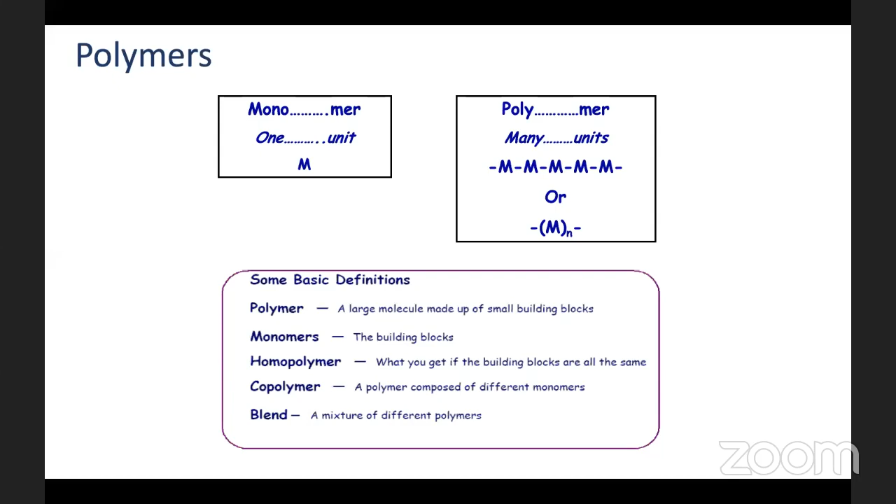So how do we classify polymers? Basically, polymers are classified into three categories: thermoplastics, thermosets, and rubbers or elastomers. Thermosets and rubbers or elastomers are 3D networks which are covalently cross-linked, and they get cross-linked when you apply heat and curing agents into them.

Thermoplastics are long chain polymers which are bound together by physical entanglements. This means the chains have van der Waals or dispersive forces between them, and they come together and form solid domains, crystalline domains, and amorphous domains. So thermoplastics can be of amorphous nature and semi-crystalline nature, whereas thermosets and rubber elastomers are amorphous materials.

Examples of thermoplastics would be polyethylene, polypropylene, which you use in daily applications. Polyether ether ketone is an engineering thermoplastic used in engineering applications. Now people are trying to use polyether ether ketone in bearing applications - they want to make bearing cages out of it.

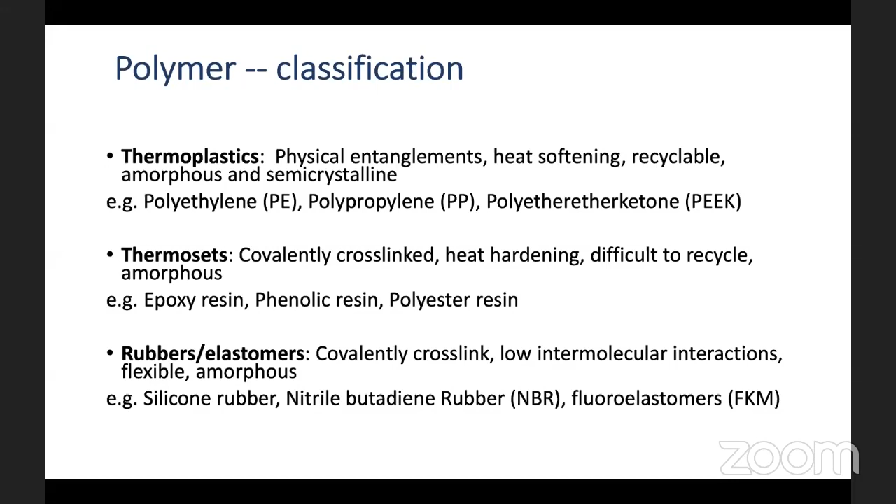So what makes polymers unique? What properties are more important for an application? Polymers are viscoelastic solids, meaning they behave both as an elastic solid and a viscous liquid.

Whether a polymer behaves as an elastic solid or viscous liquid is decided by what we call the Deborah number, defined as the relaxation time divided by the observation time. If your time of observation is very large, the Deborah number is much less than one, and you will see that everything flows.

There are instances in the Bible or elsewhere where they say mountains flowed before the Lord, because the time of observation is so high for him that everything flows. Then there is elastic behavior, where the relaxation time is much higher than the observation time. Viscoelastic behavior is in between these two.

Polymer properties depend on temperature, time, and applied stress and strain, which I will discuss further in the coming slides. Properties of polymers can be tailored for any particular application. You can compound polymers with additives and fillers to make them suitable for any application, taking into account the limitations of the polymers.

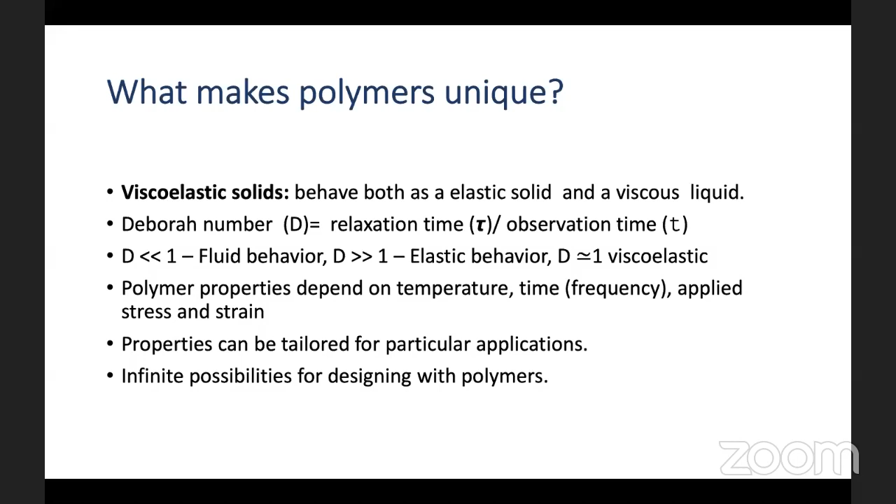Now I will talk about the most important property of any polymer, called the glass transition temperature, and then I will discuss time-temperature superposition.

Glass transition temperature is the temperature at which polymer chains start to have segmental motion. There is an onset of segmental mobility in the polymers, meaning they start to move.

If you decrease the temperature, the segmental mobility will decrease, and if you increase the temperature, the segmental mobility will increase. So there is a freezing of segmental mobility and an unfreezing of segmental mobility. The point at which this happens is called Tg of the polymer, that is, the glass transition temperature.

The segmental mobility depends on the free volume available for the polymer chain segments to move. When you decrease the temperature, the free volume in the polymer starts to decrease, the polymer starts to contract, and with less free volume, the polymer chains cannot move.

They then behave as elastic solids. You see here that if this is a shear modulus versus temperature curve, as you lower the temperature, you have an elastic solid with very high modulus.

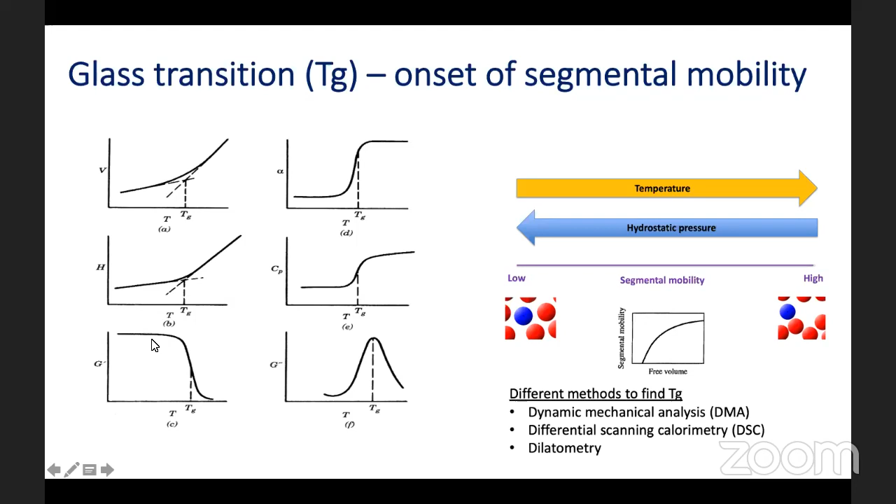I've listed some glass transition temperatures of common polymers, including some elastomers. Polyisoprene is a natural rubber with a glass transition temperature of -73. This means below -73, polyisoprene or natural rubber will start behaving like an elastic solid, and above that, it will behave as a rubbery material.

High density polyethylene has a Tg of -115, but polyethylene is still a hard solid at room temperature due to its semi-crystalline nature. There are different polymers with their Tgs given here, and their melting points are also given.

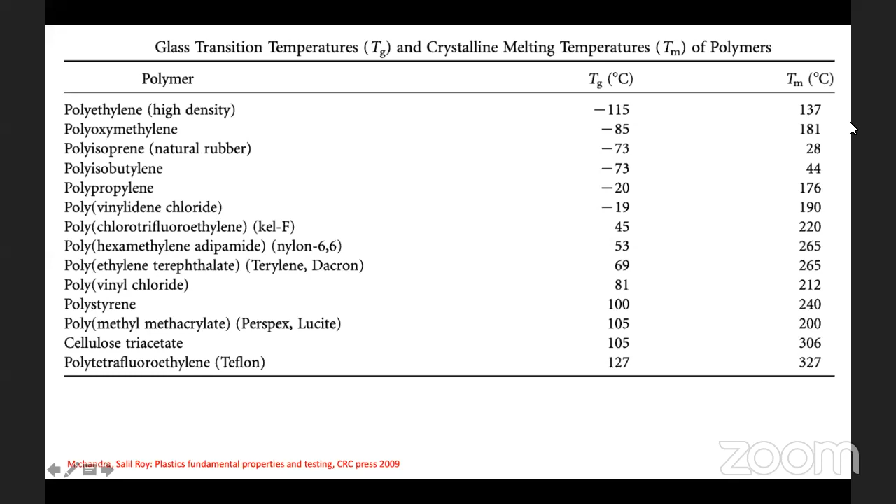In polymers, there is what we call the time-temperature superposition principle. Here we say that frequency and temperature are equivalent.

For example, if you measure shear modulus as a function of frequency at different temperatures, you can take a reference temperature, say T0, and keep it as it is, but then shift the segments measured at T1 and T2 to form a smooth master curve.

The objective of forming a master curve is to extend the range of your measurement, and to save time in property prediction. So if you want to predict storage modulus at very high frequencies, with the data here you cannot predict. But with the time-temperature superposition principle, you can shift these curves and predict storage modulus at very high frequency and also at low frequency. So this extends the range of your prediction.

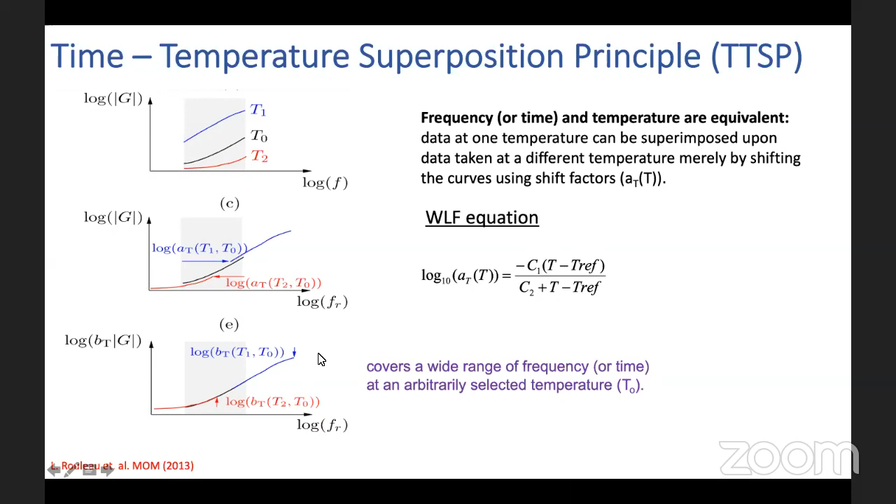Here is an example of master curves made using the time-temperature superposition principle. You can see that with this principle, you can extend the range of your property prediction. And here are the shift factors which were used to make these master curves, and each material has its own WLF fit constants.

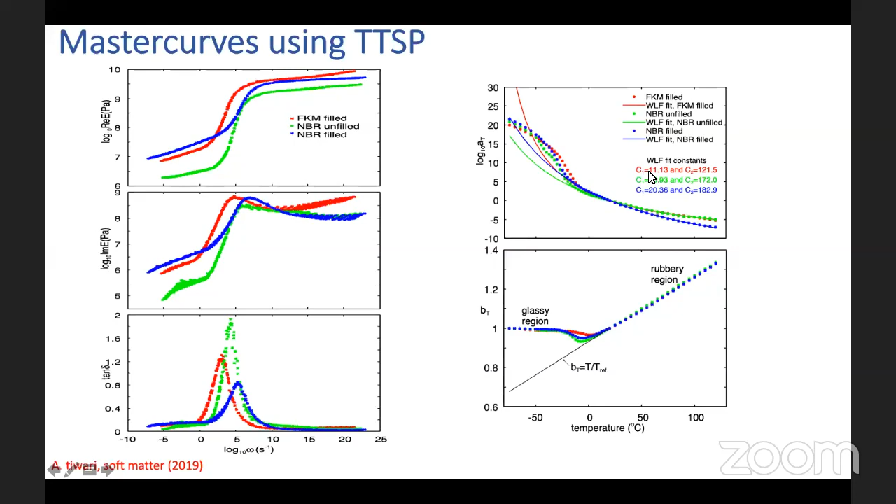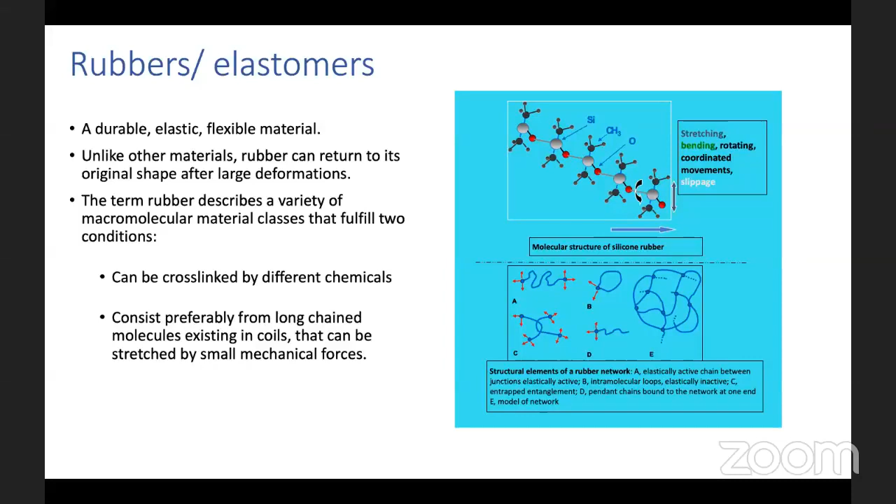Now I will talk about rubber and its viscoelastic response. Rubbers and elastomers, as I've told you, are 3D networks which are covalently cross-linked, and this covalent crosslink is the most important thing in elastomers. If there are no covalent crosslinks in the elastomers or rubbers, then they'll start to flow. This crosslink is what gives them their properties of high reversible elasticity, or hyperelasticity. We can modify the properties of elastomers by incorporating different curing agents and different fillers, which I will come to in the coming slides.

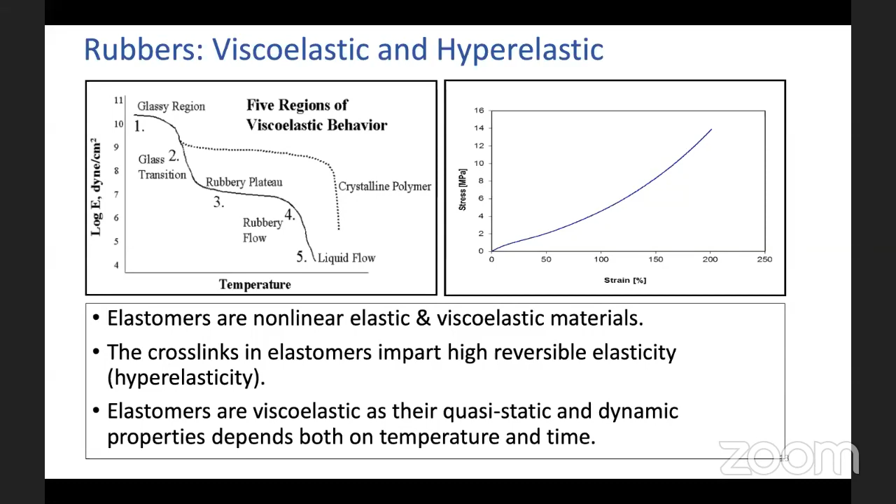Now I will talk about viscoelasticity, time and temperature behavior, reinforcing this concept. If you plot the shear storage modulus or tensile storage modulus as a function of temperature, you will see the modulus start decreasing, going from the glassy state to the rubbery state, with a change in modulus at the glass transition. The maximum of tan delta here is what we call the glass transition temperature, at the mid region of this transition.

If you take a rubber band at room temperature, the rubber band will be very elastic. You can extend it a lot. So the rubber band is in the rubbery region.

But when you take a rubber band and cool it down to liquid nitrogen temperature, then you cannot extend it. The rubber band is now brittle. It is a glassy solid, and it has a very high modulus, of the order of a few gigapascals.

Now, if you look at the frequency response of elastomers, you see that with increasing frequency, the behavior is just the opposite of the temperature behavior. So high frequency corresponds to low temperatures, and low frequency corresponds to high temperatures.

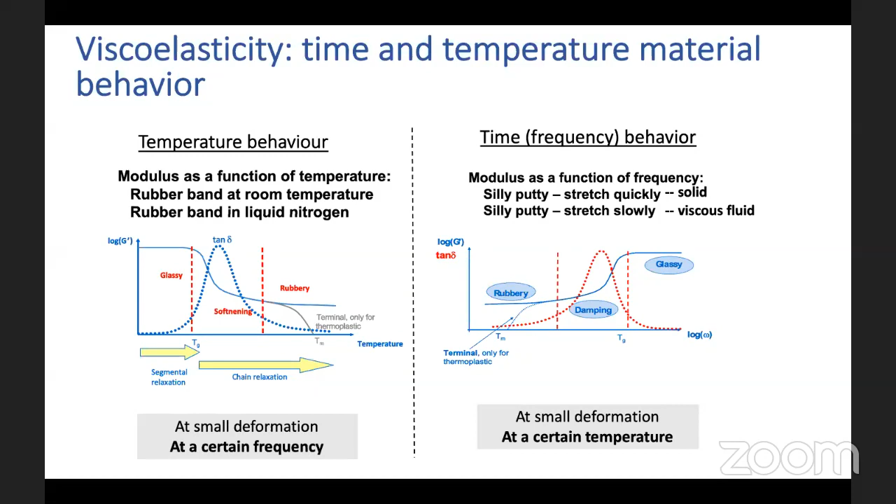So in order to make any rubber useful for an application, you need to compound it with different ingredients. There are many different ingredients you can mix into these rubbers. Rubbers can be natural rubber, nitrile butadiene rubber, or fluoroelastomers. You use them as a base material, and then you start adding fillers, anti-degradants, plasticizers, and cure systems to modify their properties for your application.

So these are different ways by which you can modify rubber's properties to get the elastic modulus response you want, or the loss behavior you want.

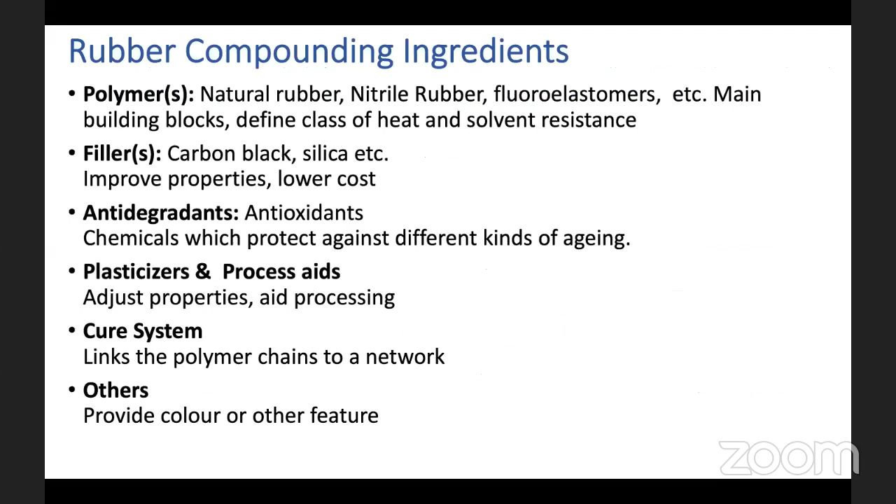For these components, for example fillers, there are many different length scales involved in making rubber composites. Fillers can be of many types: graphite, silica, carbon black. Their size varies from sub-nanometer to hundreds of nanometers. So the main point is that in making rubbers for a particular application, fillers of different dimensions are used.

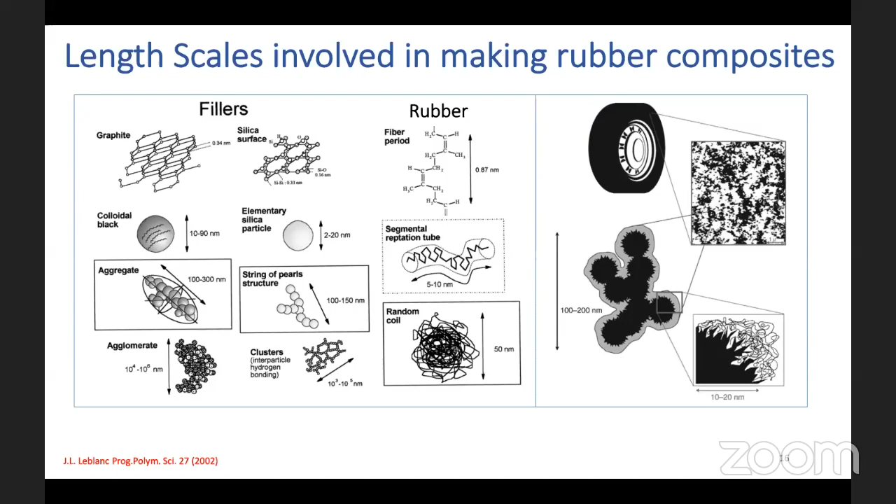So what you basically do is the main process: you take different additives, that is antioxidants, plasticizers, fillers, processing aids, and curing agents, and then you mix them. You mix rubber with these additives in a mixer — in the rubber industry, this is called a Banbury mixer, or internal mixer. You also add the curing agent here. Then you get a mixed compound.

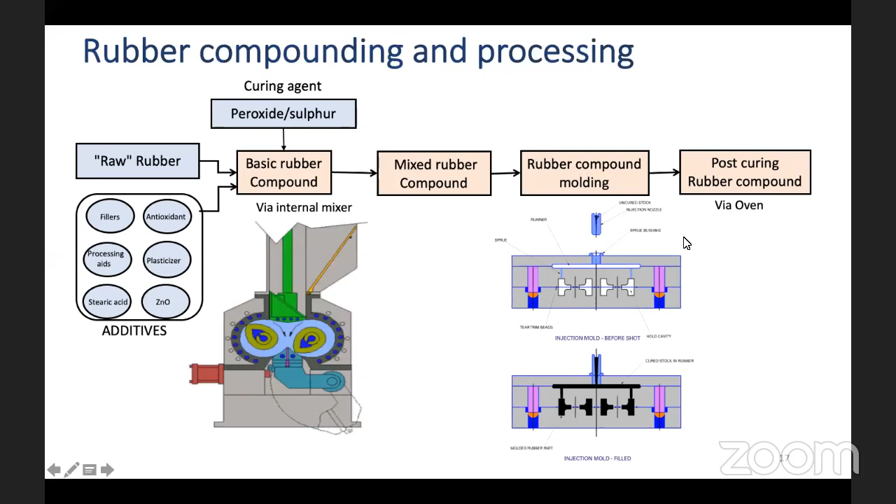Then you mold the compound by compression molding or transfer molding, and after that you post-cure the compound to get products. Products can be tires, seals, rubber plugs in syringes — seals can be dynamic seals or static seals. So from the basic raw material, you can make, through rubber compounding, material for engineering applications.

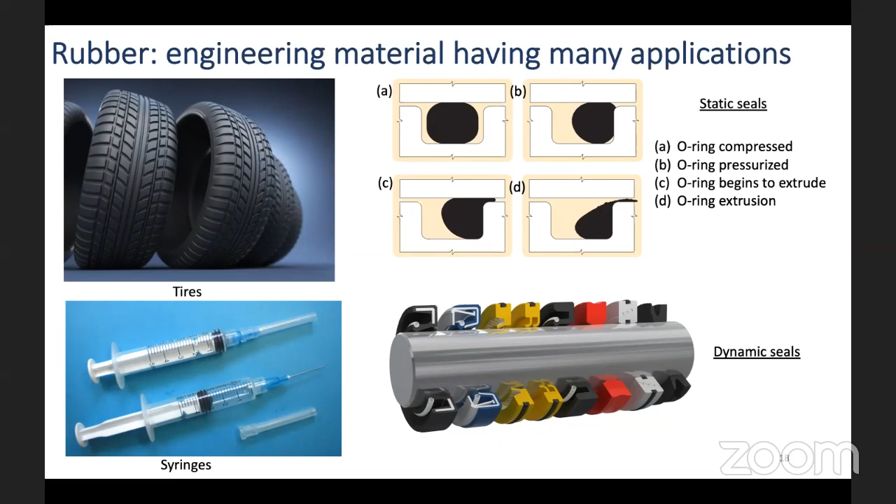Now I will talk about the main topic of our talk, which is tribology. Tribology, as you all would know by now, is the science in which you study how surfaces interact with each other in relative motion. It involves friction, adhesion, and contact mechanics.

Contact mechanics is very important, because when two surfaces come in contact, they form a contact, so the mechanics of that contact is very important. Then there's lubrication and wear — these comprise the study of tribology.

For example, if you take a car, you have different avenues where the concepts of tribology are used. You use lubrication in engine and gear, and there are many seals where you don't want leakage — there are rotary lip seals, O-rings, which you don't want to leak. Then there are tires in cars, which have interaction between tire and road.

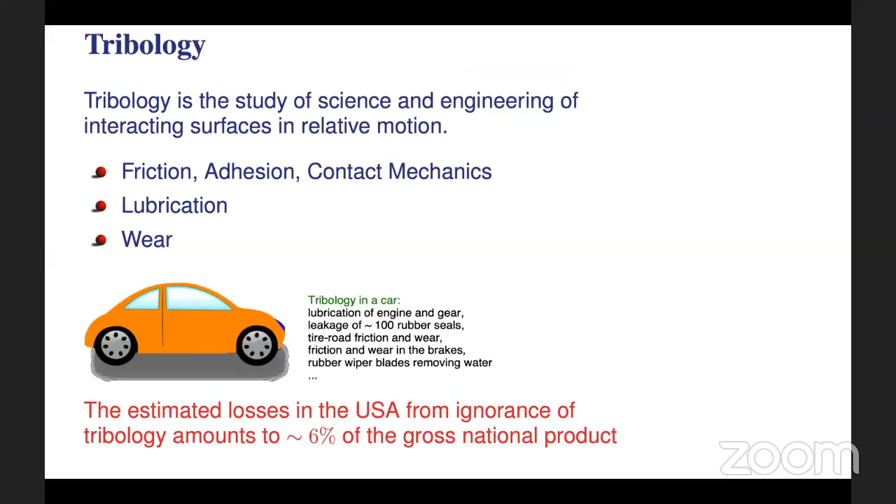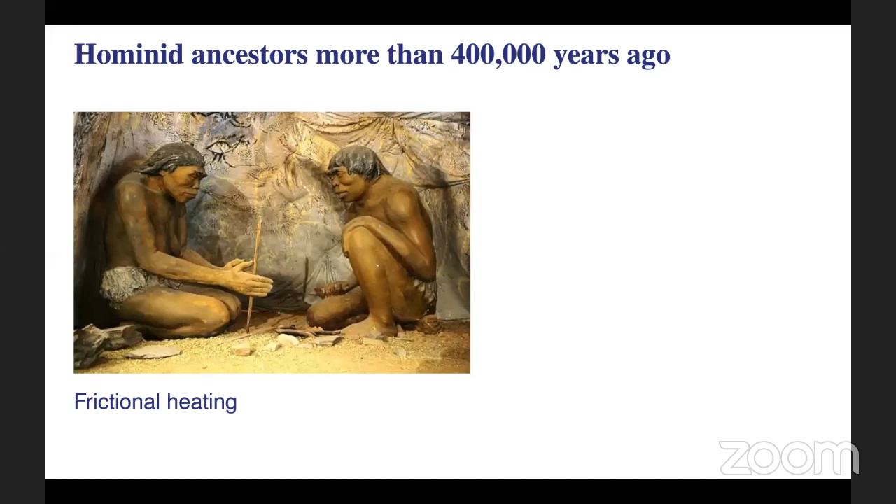Leonardo da Vinci was one of the pioneers in starting tribological studies. In Leonardo da Vinci's time, there was no concept of force. He used blocks, and was able to formulate his crude laws.

For example, here you see that there are two blocks. They have different apparent area of contact. This block has a smaller apparent area of contact, and this block has a bigger apparent area of contact. But the weight or the mass of them is the same. So the frictional force that is required is also the same.

People will think that the frictional force in both blocks will be different. But as the frictional force is dependent on the area of real contact, and the area of real contact depends on the normal load, we see that both blocks will start to move at the same frictional force.

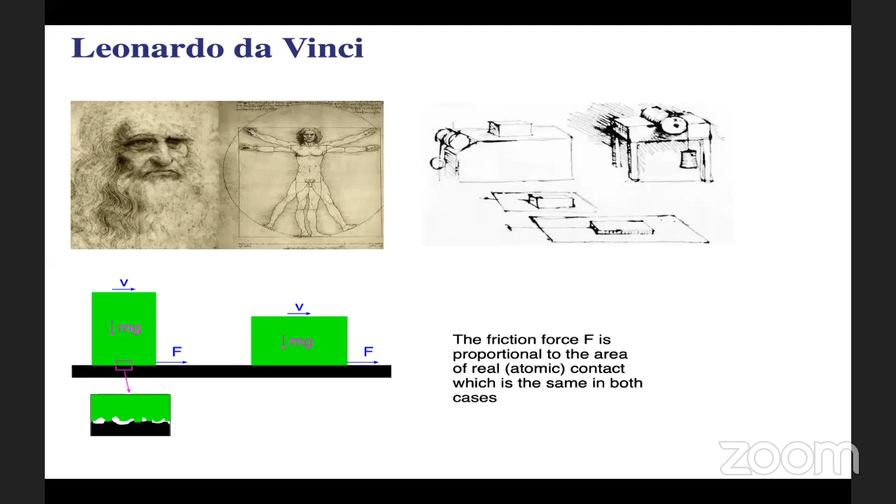Tribology is all about surface interactions. Wolfgang Pauli, one of the great physicists, said God created the volume, but the surface was invented by the devil. But surfaces are very important, and interaction between solids usually occurs at surfaces where they contact each other.

I have already told you, in the previous examples, that cars have wiper blades to remove water from the windscreen. Here you have a syringe application: you have a rubber plug against the barrel, and the problem is that if the break loose friction is very high, then it's very difficult to inject fluid into the patient.

So in syringe application, we want stable sliding friction and low break loose friction. This is a challenge, and for this you have to optimize many different parameters. Here you have tire and road, which is a typical tribological situation. I will talk about that more in coming slides.

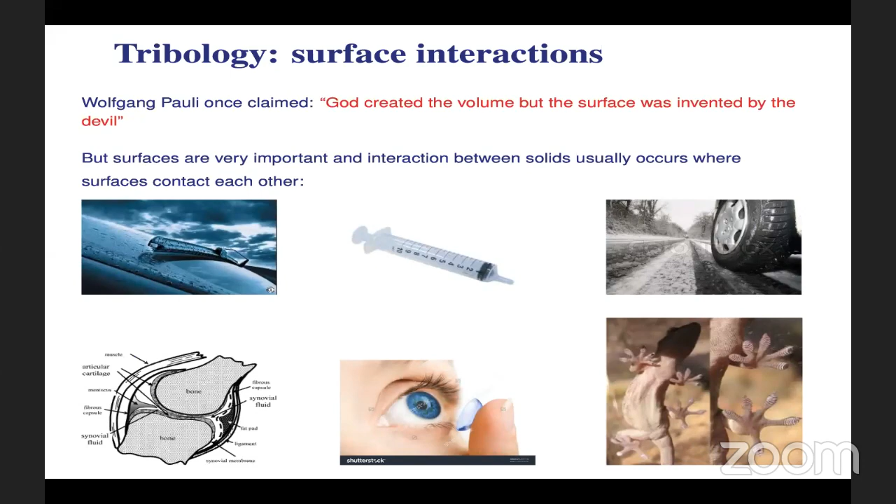If you take two steel blocks, because of surface roughness the area of real contact is very small. If you calculate it for a steel block 10 centimeters wide, the area of real contact will be approximately 0.01 square millimeters. This is for elastically hard solids. But if you take a smooth rubber, for example a tire application, the area of contact will be approximately 1 square centimeter.

If you accelerate your car, you sometimes see smoke coming out, because at such a small area of contact, acceleration causes high frictional heating, which can lead to disintegration and aging of your rubber, and destroy your tire. So this is also a challenge: to make tires which don't disintegrate.

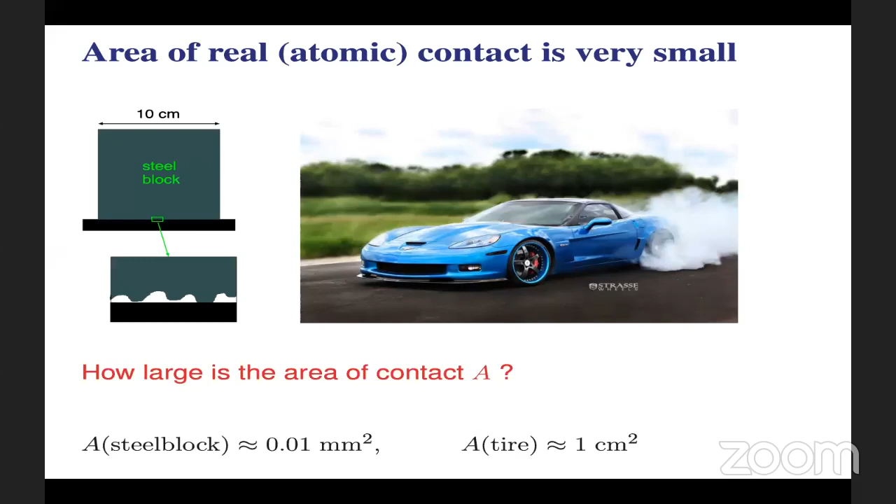Now I will talk about the main topic of this whole talk: surface roughness. I will briefly discuss Persson's theory of contact mechanics. All surfaces have surface roughness.

In any engineering application, even in ball bearings, which you see with the naked eye, the balls look very smooth and shiny, and it seems there is no surface roughness. But if you start magnifying the surface, you will see surface roughness. If you magnify further at the top of an asperity, you will see further surface roughness, and this continues up to the atomistic level.

There are at least seven decades in length scales, from centimeter to nanometer level. So if you want to do numerical computation for a tribological system, you have 7 decades of length scale in the x direction, 7 in y, 7 in z — that's 21 different length scales, and many degrees of freedom.

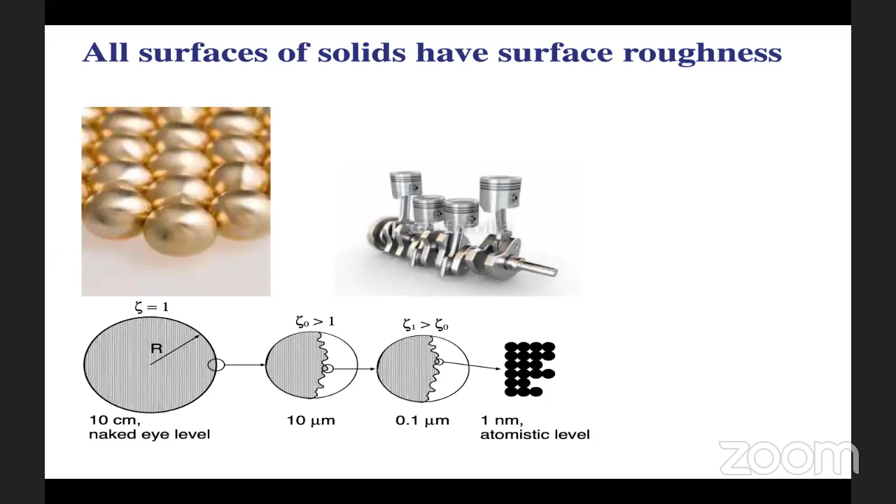So we need an analytical approach, and that analytical approach is what Professor Persson has proposed. Professor Persson has proposed a new contact mechanics, which is a multi-scale contact mechanics. You would have already learned about surface roughness power spectrum from maybe Professor Bobji's lecture. I will just review it here.

If you measure surface roughness, suppose using a stylus instrument, you can decompose this surface roughness into a sum of sine and cosine profiles having a height amplitude and a wavelength. Then you can plot the square of the height amplitude versus the wave number. The wave number is equal to 2 pi upon the wavelength.

So if you plot the square of the height amplitude with the wave number, you will form what we call a power spectrum. This power spectrum contains all the information that is needed to know about a surface and its roughness characteristic.

So the region between Q0 and QR is what we call the roll-off region. Here the height amplitude is the same - if you even change your wave number, it will not change. So this is the roll-off region.

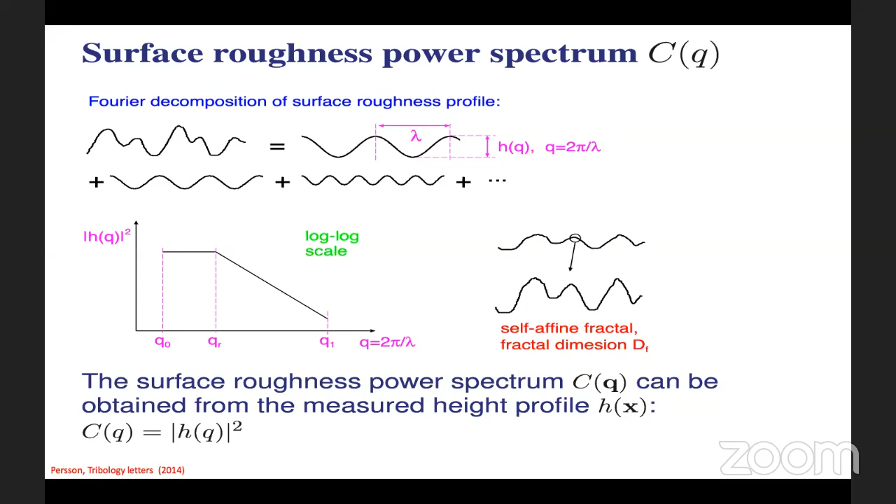So here I show surface roughness power spectrum of different surfaces. Here it's asphalt, here it's grinded steel, here it's a human wrist skin, and here it's a peeled adhesive tape. You can see that there is a power law relationship here, this slope, and this slope is similar in all of the different surfaces. This slope gives you a Hurst exponent, and from the Hurst exponent you can calculate what we call fractal dimension.

You can see the fractal dimension for all the surfaces lies between 2.2 to 2.3. This fractal dimension of 2.2 is, we can say, naturally found for many naturally occurring surfaces.

And you can see here, for example, grinded steel - you can measure your surface roughness with different instruments. Here it was done by 1D line scan, 2D AFM, and 2D scanning tunneling microscopy, but then they basically overlap with each other to form a complete power spectrum, ranging from a centimeter to a nanometer. So depending on the length scale you're interested in, you can use different techniques to characterize your surface. This surface roughness power spectrum is very important to characterize the surface roughness of your materials. It has all the information needed for doing contact mechanical calculations and related predictions.

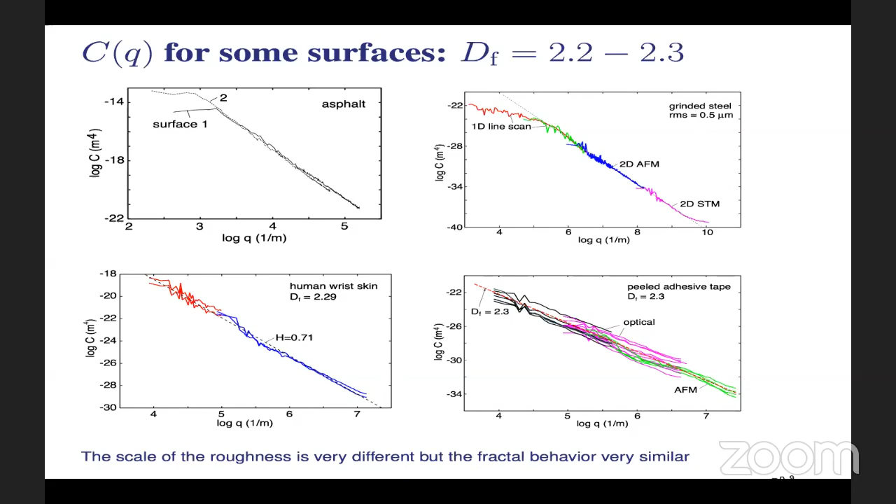So now I come to contact mechanics. Contact mechanics basically starts with Hertz. Hertz was known for his work in electromagnetism, but tribologists know him because he gave a relation between contact area and the force between two spheres which are squeezed together. According to Hertz, the area of real contact when two elastic spheres are squeezed together has a non-linear relationship - the area of real contact depends on the normal load to the power 2/3.

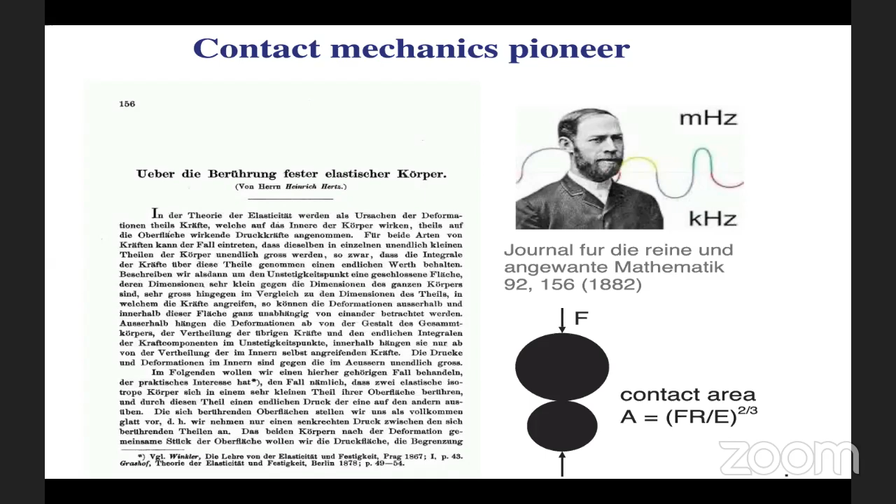I will now introduce Persson's theory and various contact mechanics theories.

If you take two randomly rough surfaces and squeeze them together, you will form contact like this, with areas where you make contact and areas where you don't. When you count all the areas of contact, you can find the area of real contact.

You can also find the average interfacial separation and the non-contact areas, which are very important in certain sealing applications. For example, a static o-ring in contact with a surface: the non-contact region decides where and how leakage will happen, and whether it will happen at all.

Hertz in 1882 took an elastic solid and compressed it against a rigid solid having spherical bumps of equal radius. Each contact can be treated as an individual Hertz contact. From these calculations, you can conclude that the area of real contact depends non-linearly on the applied normal force.

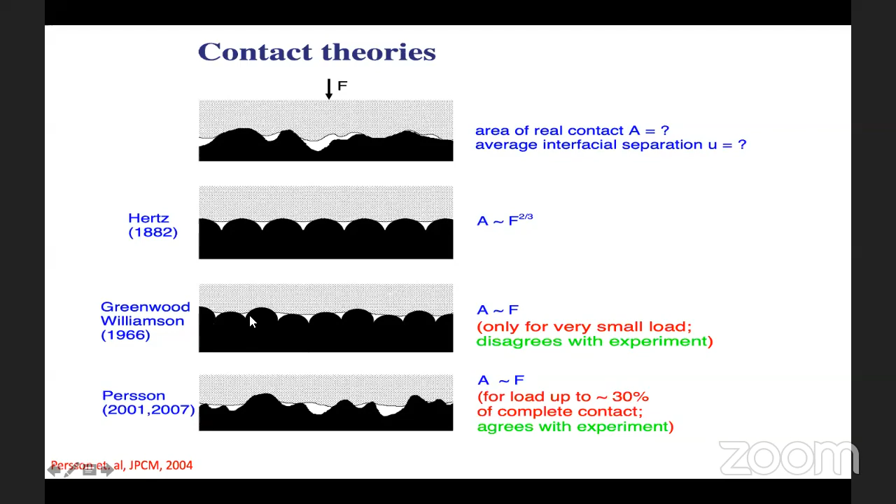This means that if this asperity pushes the elastic solid, the nearby asperities should lose contact. But because Greenwood-Williamson does not consider long range elastic deformation, they treat each contact as a separate, independent contact, so they are not able to give a correct theory—and I will show why.

So what might go wrong if you predict the contact area incorrectly? For example, take a static sealing application where there is a fluid at high pressure on one side, and a seal that has made contact with this kind of contact area distribution.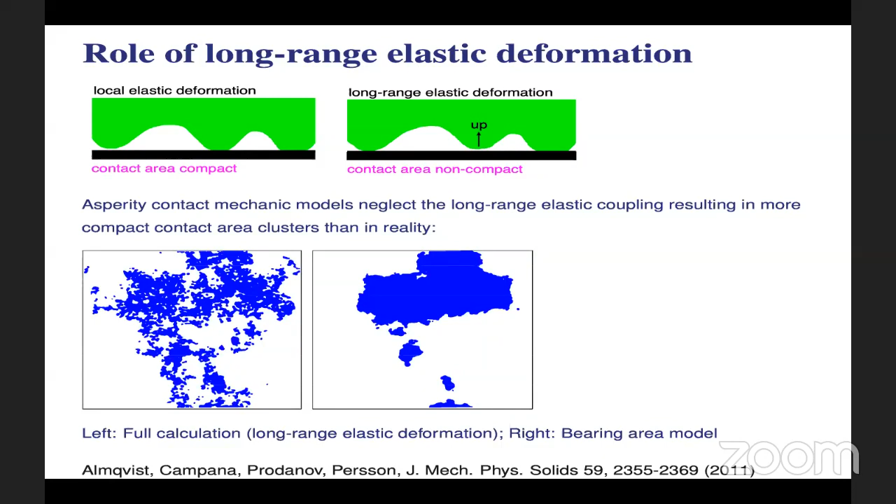So what is Persson's theory? Briefly, I will describe what Persson's theory is.

Every engineering surface that you see with the naked eye appears smooth. At this level, we can say that if you apply a normal force or pressure uniformly, it will be the same at the interface. If we neglect friction, the pressure at the interface will also be the same.

This means that if you plot the stress distribution, the probability stress distribution, you will get a Dirac delta function. This means there is only one stress at the interface, and the probability of finding that stress is very high. The delta function is very thin and infinitely high, and the area under the curve of this Dirac delta function is 1.

So at the lowest magnification, with the naked eye, we see that at the interface you will have the same stress that you apply.

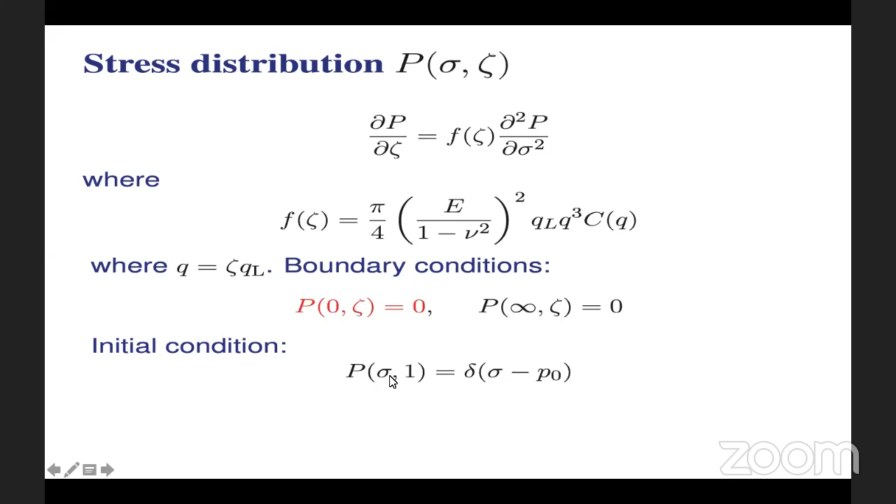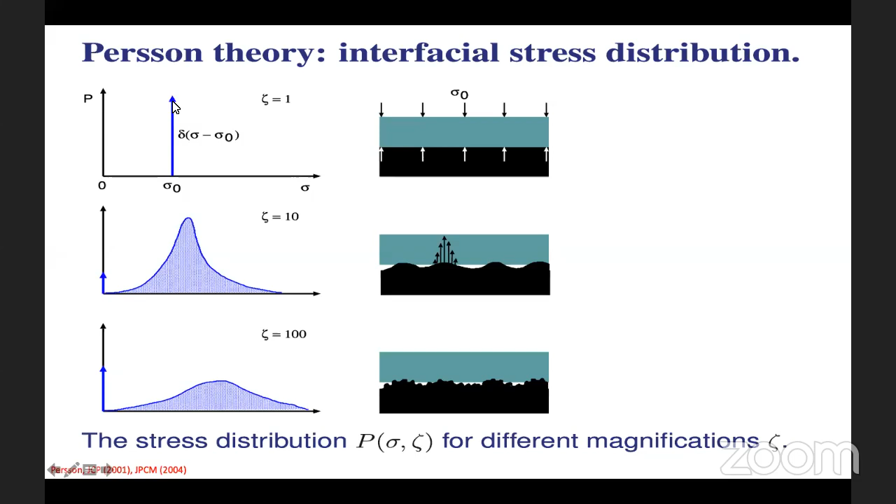The initial condition is that at the lowest magnification, you have a single stress, which is what we see at the lowest magnification. This gives us a Dirac delta function here, showing that at the lowest magnification, you have a single stress at the interface.

When you predict the area of real contact as a function of load using exact numerical simulations, done for very small systems, and compare with analytical Persson's theory, you will see they are basically valid up to 30% of the contact, that is, up to 30% of the area of real contact.

So, with a over a0, where a is the area of real contact and a0 is the apparent area of contact, when this relative area of contact is 1, there is full contact, meaning at high pressures there is full contact. There is a linearity between the pressure and contact area up to 30% of the load.

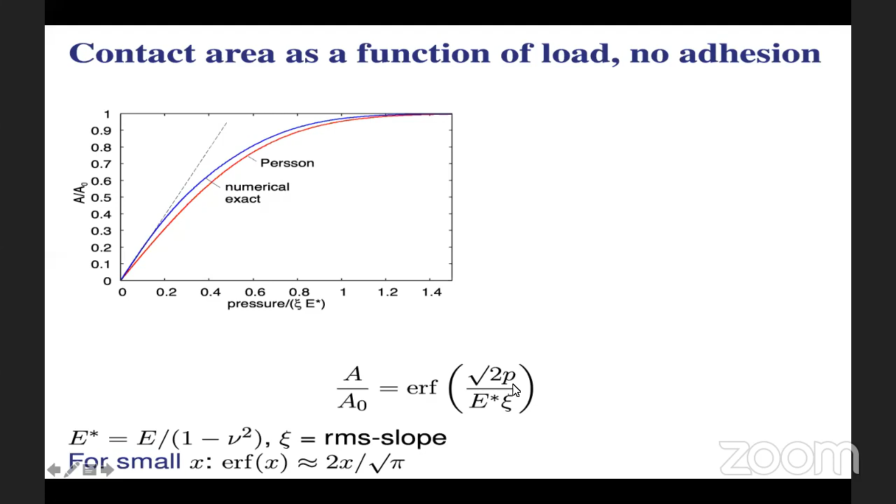Now I will briefly talk about how we talk about rubber friction. I will talk about some basic theory, and then I will try to explain some experimental results.

So rubber friction. When you have a rubber sliding on a rough surface, there are different contributions to friction. The friction force is a combination of viscoelastic response, F visc, and a force term which is due to adhesion.

In adhesion, if you consider this to be dry sliding with no lubricant present at the interface, then this adhesive contribution to the friction force is the shear stress times the area of real contact. So the adhesive friction basically arises because of the shearing of the area of real contact.

Schematically, if you measure rubber friction as a function of velocity, you will find a curve which is a combination of two curves, mu con and mu visc. Mu con is nothing but the contribution from the adhesion.

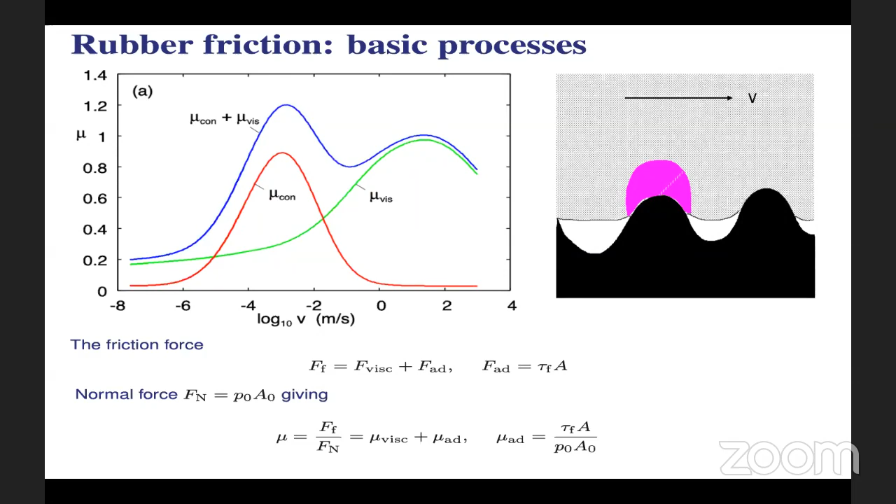If you slide a rubber on a surface with roughness, you will see there is large energy dissipation at the interface, because friction is a dissipative process. So basically friction happens fundamentally because it's a dissipative process, and dissipation of energy is required for friction to manifest.

So when you move the rubber along the rough surface, the asperities will deform the rubber at different frequencies, and that will give different dissipation energies, which will decide the friction. There are many levels at which the energy dissipation takes place, and for short length scales, the energy dissipation is very high.

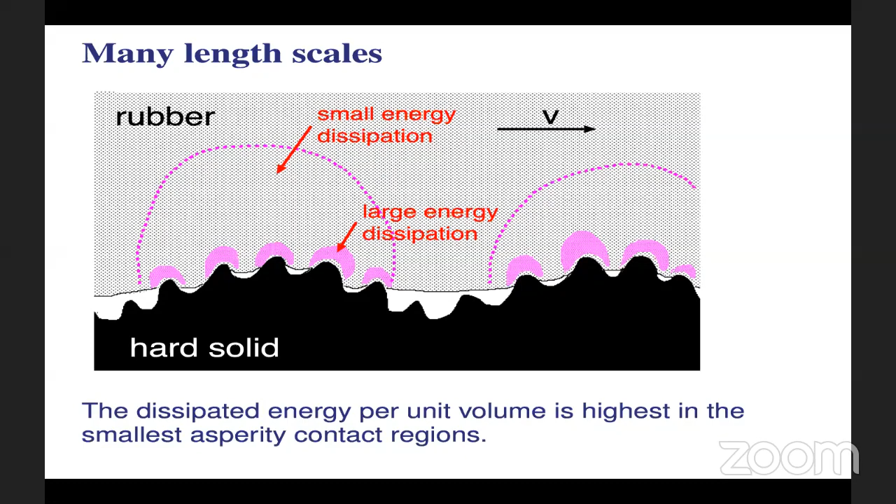But according to Persson's theory of contact mechanics, you cannot exclude any length scale when calculating this energy dissipation. You have to include all length scales. Short length scales are as important as long length scales.

If the ratio between the height amplitude and the wavelength is the same in both cases, they will have equally important contributions.

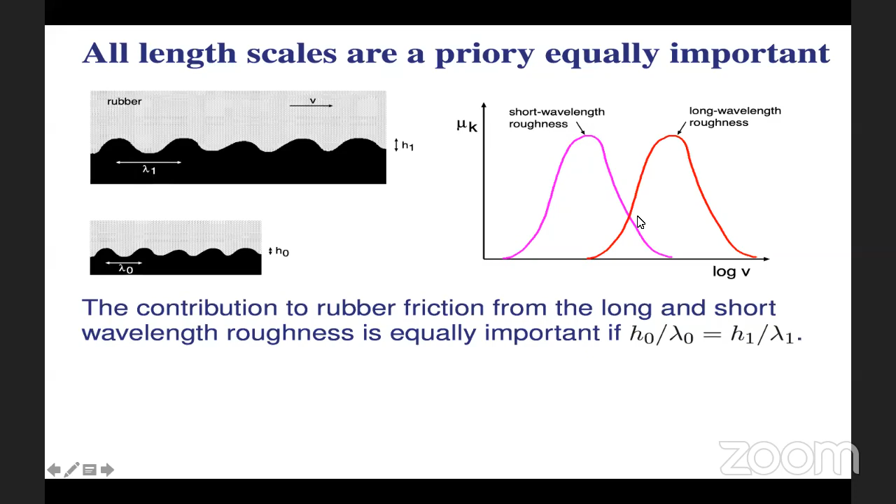So there are two things that are important for predicting the friction of a rubber: the surface roughness power spectrum C of Q, and then the elastic properties of the rubber.

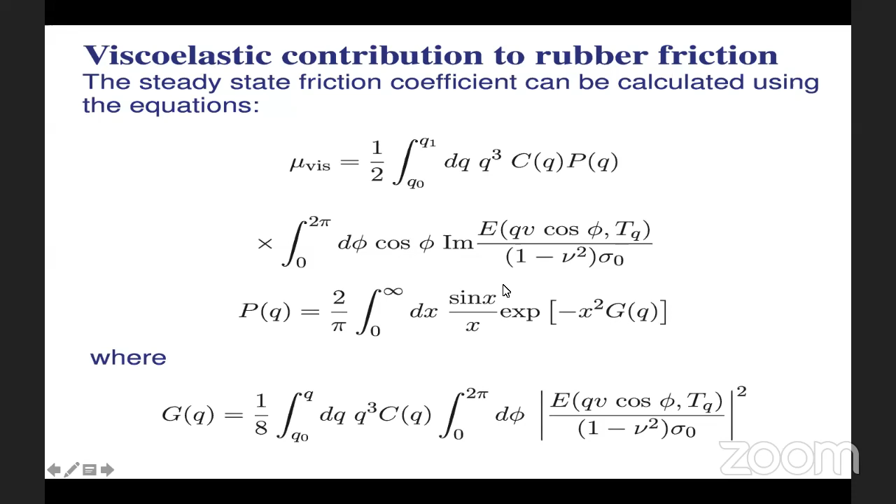And when you start to move, these chains are stretched and stressed, and when they are stressed long enough, they will break the contact and release energy. That energy is the fundamental reason for how friction appears due to adhesion.

So at low velocities, there is a lot of time for the rubber molecules to bind to the surface, and the frictional shear stress or the adhesive contribution to friction is less, because the rubbers are binding tightly to the substrate. But you will see a bit of energy dissipation because of thermal fluctuations of order kT, which can break the bonds.

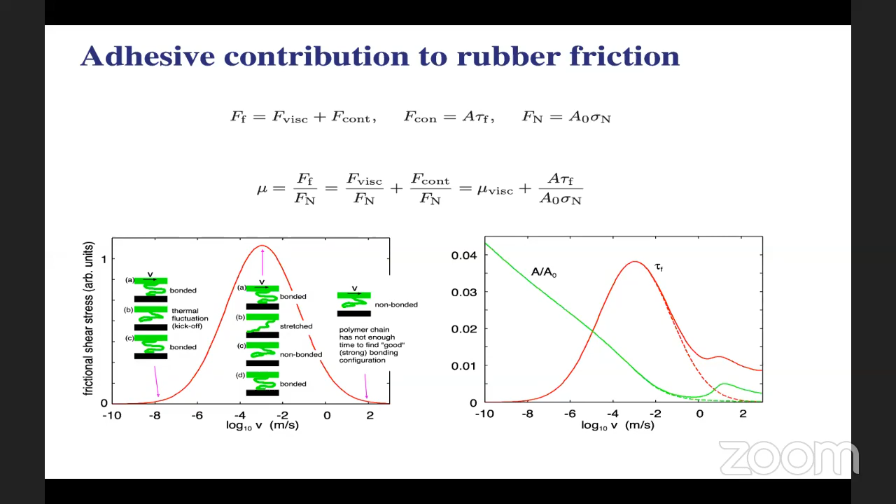The fundamental here is that the chains bind to the substrate, and then they perform stick-slip type of motion, releasing energy which contributes to adhesive friction. There are many more contributions to the adhesive friction coefficient, and this happens at the area of real contact.

If you consider the asperity and the rubber, and move the rubber over an asperity, then you have some cracks at the edges. When those cracks open up, they release energy, which can also contribute to the overall frictional force and the resultant adhesive friction coefficient.

Rubbers have different fillers in them, as I told you before, and these fillers can scratch the surface of the substrate. That wear process, the scratching and plowing mechanisms by the filler particles on the substrate, can also be a cause of energy release, contributing to friction in the area of real contact.

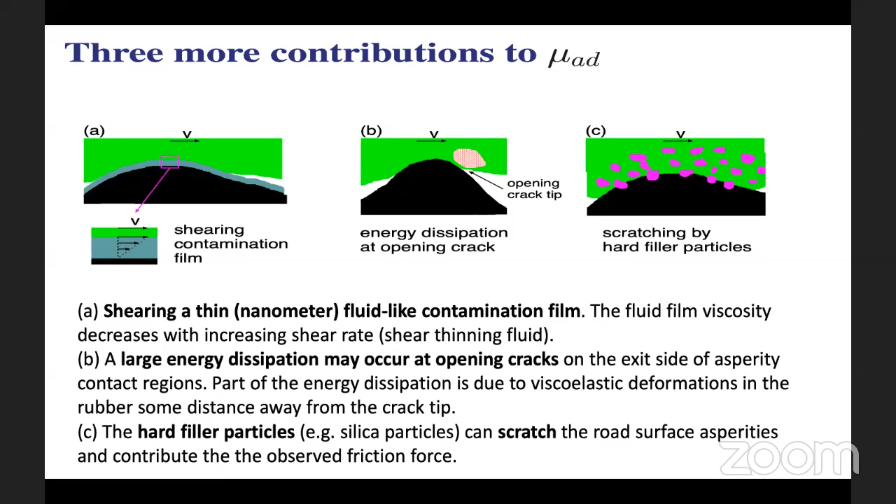I will now talk about some experiments we did here in Jülich. We have a friction freezer in the lab in which we can measure friction. Inside it we have a surface of interest, a substrate of interest, and that substrate is driven by an electric motor with a gearbox.

We load the substrate with a sample whose friction coefficient is to be known, and then we start varying the velocity. In our experimental setup, we can vary the velocity from 1 micrometer per second to 1 centimeter per second, and we can vary the temperature from minus 45 degrees Celsius to plus 20 degrees Celsius. So we can measure friction coefficient or friction force as a function of temperature and velocity.

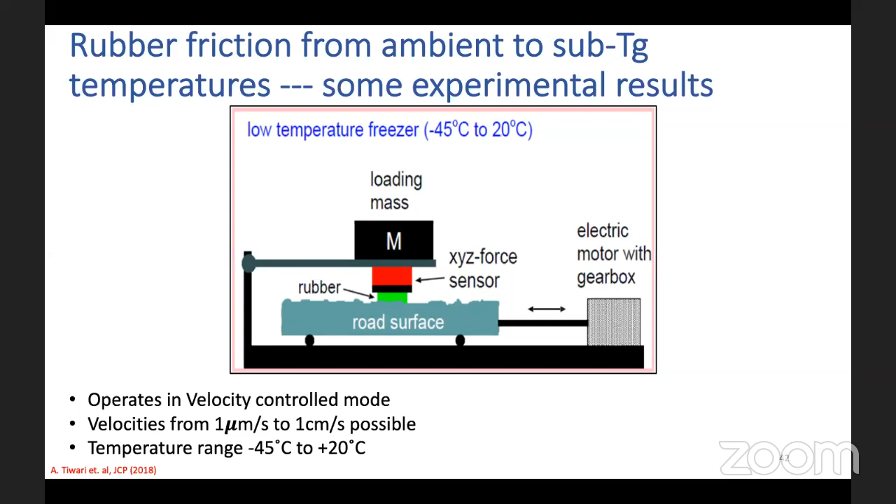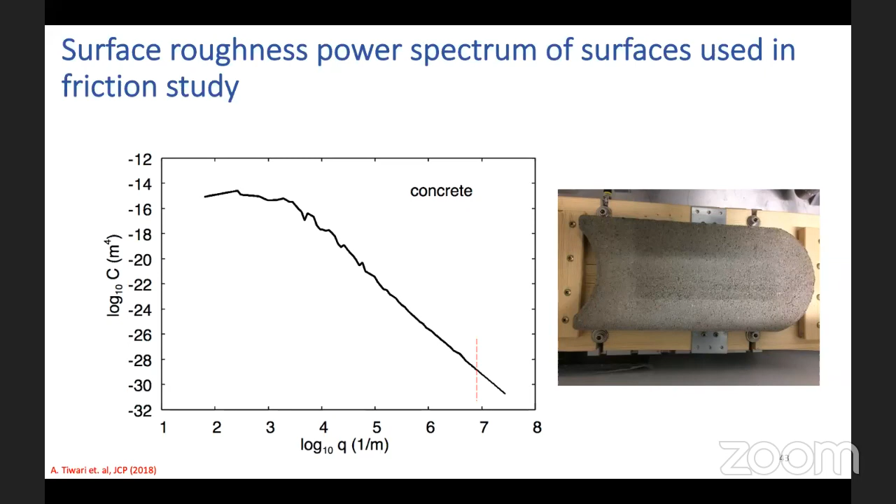What he did with this raw data was use bulk viscoelastic shift factors. In the earlier slide, I showed you an equation called the WLF equation. Grosch's brilliance was showing that these curves can be shifted by the same shift factors that govern the shift of viscoelastic materials to form a master curve.

He shifted them with the same shift factors and obtained a friction master curve. This showed for the first time that friction results from the energy dissipations taking place in the bulk of the rubber.

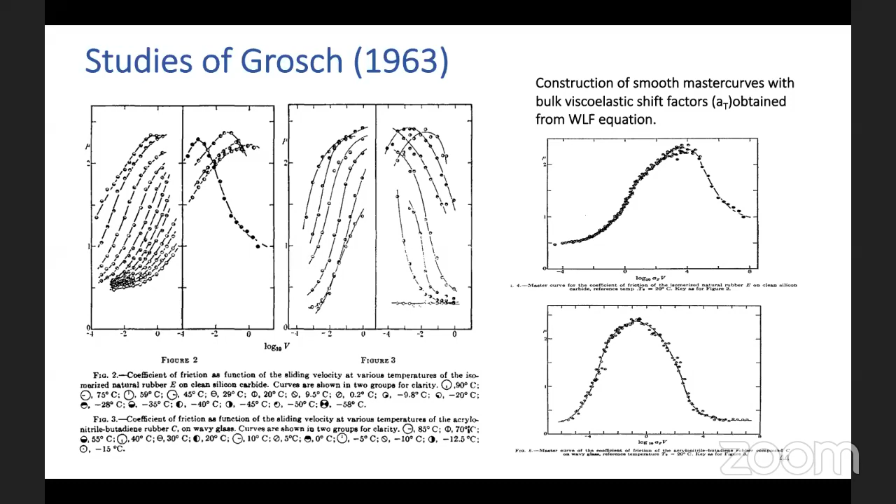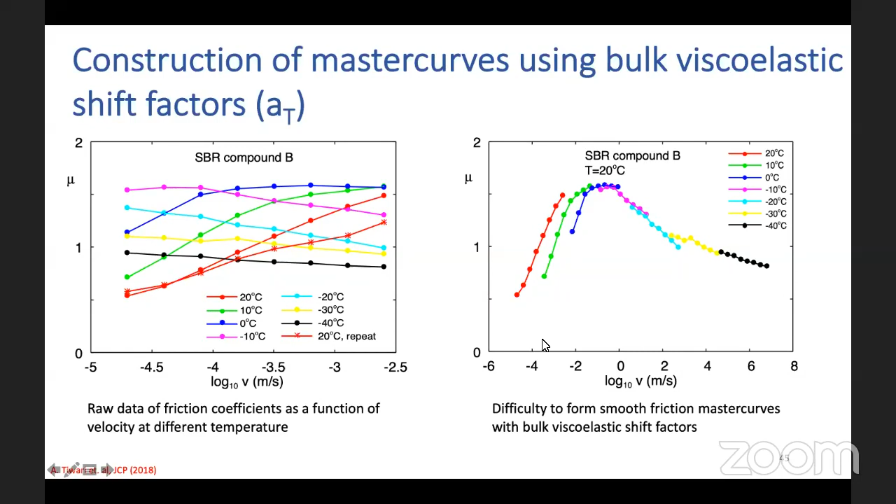When we use the bulk shift factors obtained from the viscoelastic data of this material, we are not able to form a smooth master curve as formed by Grosch. Grosch was able to form smooth master curves, but we were not able to. So what we did was we anyhow shifted the curves and formed a smooth master curve.

Then we realized that the adhesive contribution to friction has a different temperature dependency than the bulk. Adhesive contribution basically takes place at the surface, where the rubber patches bind and then do cyclic stick slip. So it has a weaker temperature dependency as compared to the bulk of the rubber.

Why there is a weaker temperature dependency can be explained by the fact that when you have rubber sliding on a hard substrate, because of short wavelength surface roughness, there is a region of high chain mobility at the interface, and that has low energy barriers for segmental mobility at the interface between the rubber and the hard substrate at short length scales. This is the main reason why we see low activation energy here.

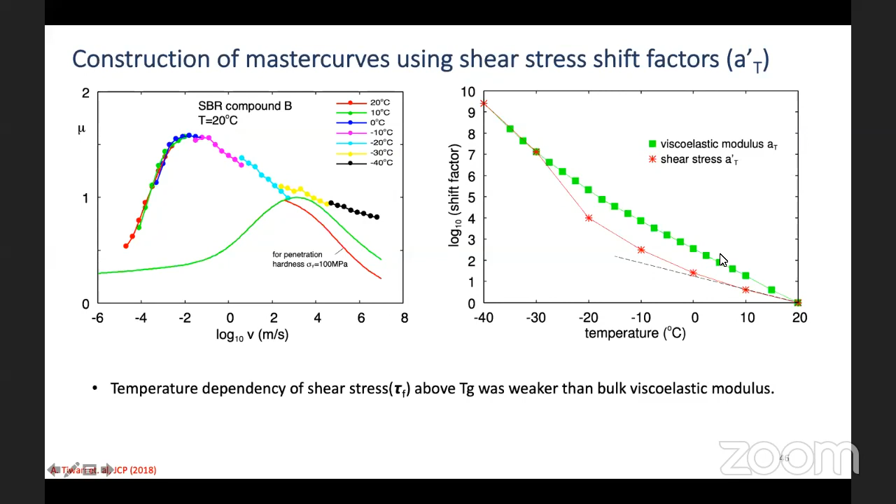For the adhesive friction, the activation energy, which is of the Arrhenius type, has an activation energy of 1 electron volt at the surface. But in the bulk, for segmental mobility to happen and for dissipation to happen, the activation barrier energy is approximately 2 electron volts. Because of the free volume available at the interface between the short length scale roughness and the rubber, you have this weaker dependency.

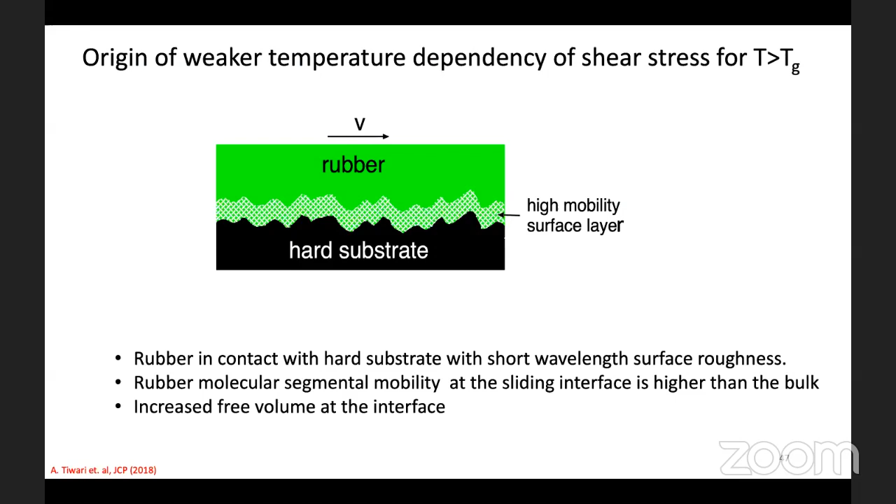Now I will talk briefly about sealing at low temperatures. In 1986, NASA had a space mission called Challenger, and that mission basically failed because people at that time were not aware of, or somehow ignored, the fact that the o-ring used in the rocket booster started to contract, and there was a leakage path that formed for the fuel. The fuel leaked, and then the tragedy struck. The Challenger mission had a bad ending, many people died because of not properly understanding or ignoring the tribological aspect or the viscoelastic aspects of rubber. This tragedy happened.

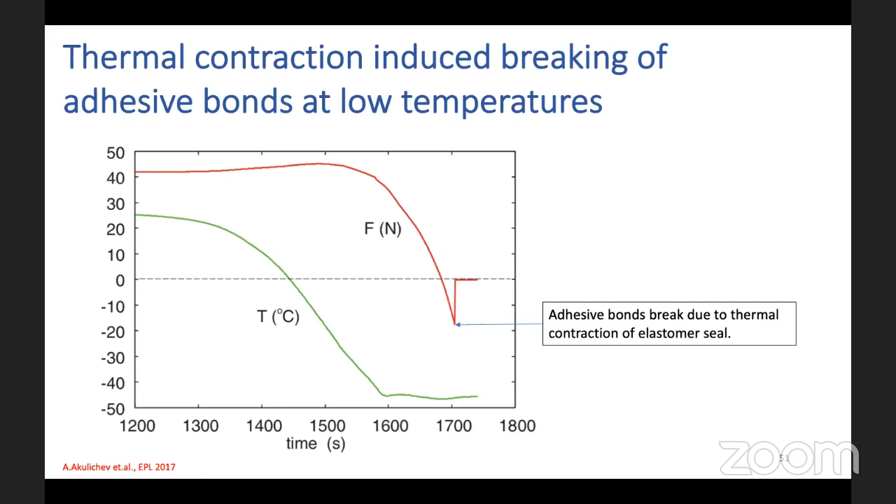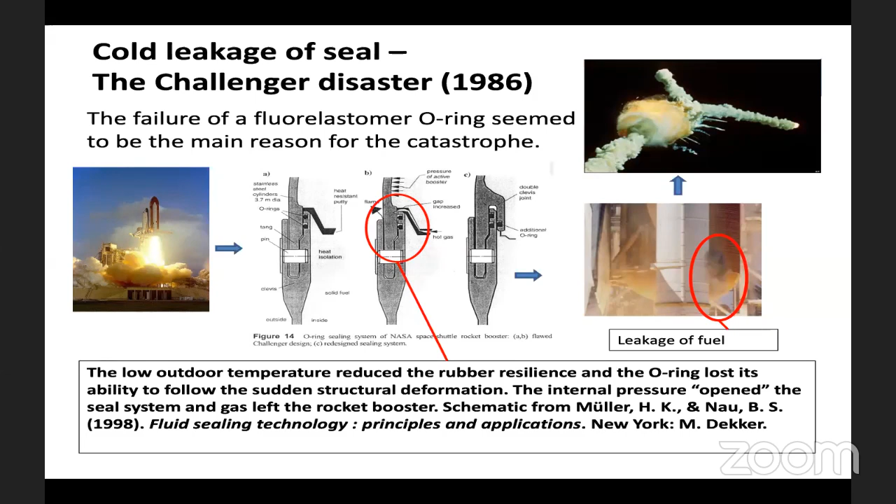So in the Challenger disaster, this is what happened. They loaded the seals, and there were elastic deformations, and those elastic deformations basically got frozen in, coupled with thermal coefficient of expansion mismatch. They all combined, and there was a leakage, and it was very catastrophic.

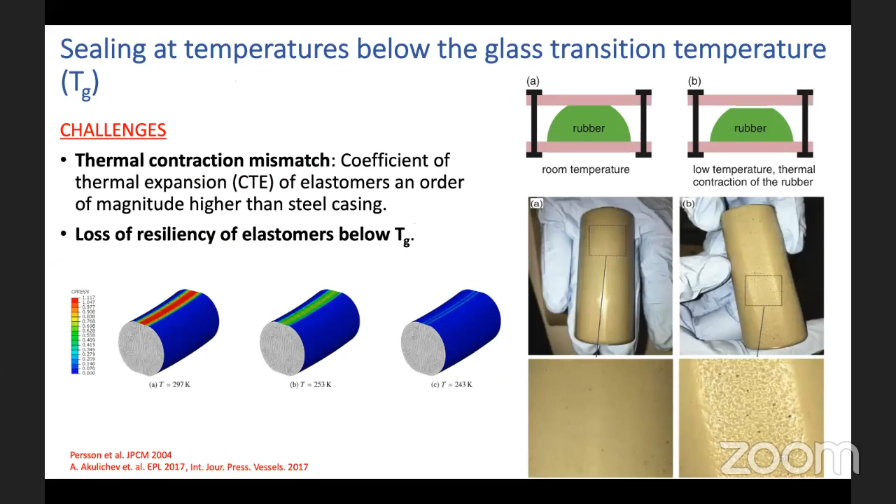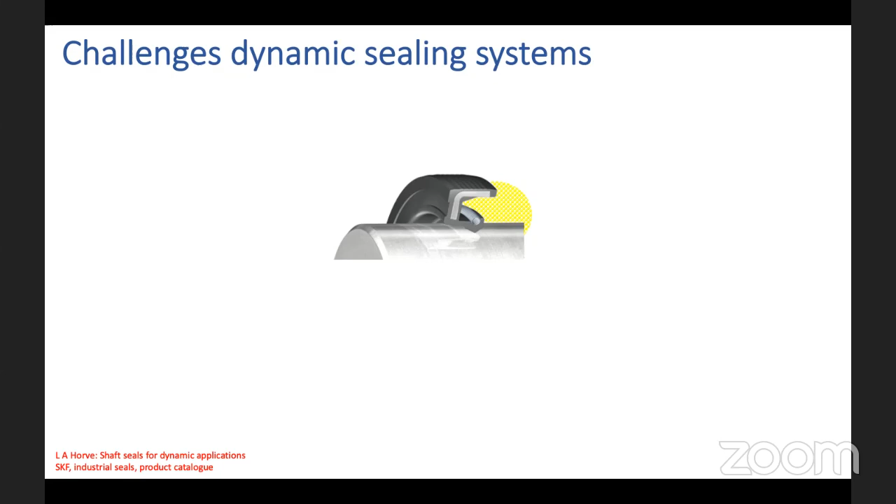I will talk a bit about dynamic sealing systems. Dynamic sealing systems are where you have movement in the O-rings. These quasi-static systems have very little movement, but in dynamic systems, whether it's reciprocating seals or rotary lip seals, you have movement. So there are many challenges.

For optimizing tribological performance, you have to optimize many things, because in tribology you have to optimize the system properties. Here you see that a rotary lip seal is made up of rubber materials, and it has its own properties, viscoelastic properties, its own friction properties. It can age, and it's heterogeneous, so there are many variations in material properties.

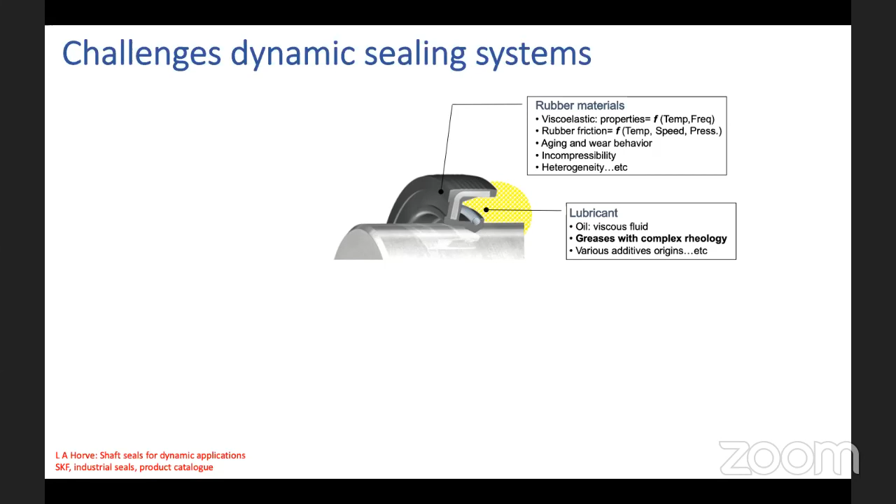Then lubricant—you have to also optimize the lubricant if you want a good sealing system which does not leak, gives low wear, and low friction. So you have to use a good lubricant. In lubricants you can use grease or oil, and there are various additives in oils which have to be optimized for a particular sealing system. Oils should be chosen such that the rubber material doesn't get degraded and doesn't lose its elasticity property.

Then there's the environment—what temperature range are you looking at? If you want to seal at low or high temperatures, and harsh operating conditions, for example oil and gas industries demand high temperature, high pressure sealing systems. In the automotive sector, you need seals which can last up to 25 years, with high lifetime, low friction, and low wear needed. So there are many requirements.

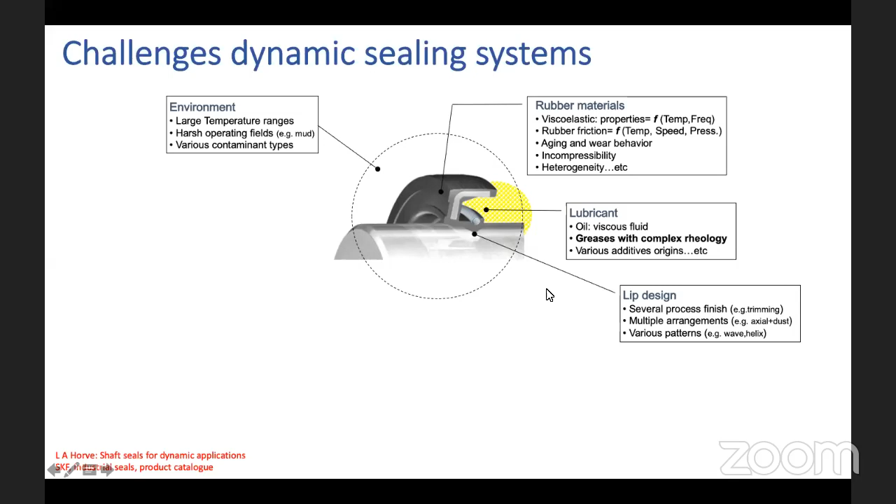So you have to optimize many properties like these, and the design also plays an important role. In this rotary lip seal, you can design your lip so that if you want low friction, the area of real contact is a bit less, but at the same time not compromise on leakage. You can have different patterns of seals, wave and helix, and different arrangements of these seals.

Surface is also very important. On the shaft on which the rotary lip seal sits, you can have different finishes, and that will also affect the properties, as we've seen that the two surfaces and their surface roughness are very important. Then the operating conditions also pose a different threat—dynamic runout or shaft-to-bore misalignments, and the conditions of pressure, velocity, and temperature.

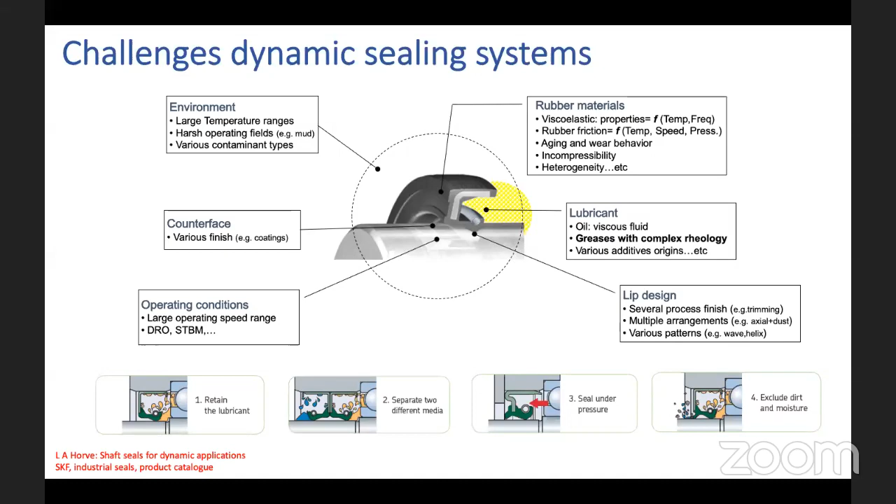So there are many things that will affect and pose a challenge to dynamic sealing systems. Basically, these rotary lip seals are used for retaining lubricants, separating two media, sealing under pressure, and excluding dirt and moisture. If you want to optimize all these four functions in a rotary lip seal, you have to play with all these variables and many sub-variables to really get an optimized tribological system for your application.

So in conclusion, we have seen that polymers are viscoelastic, and their properties depend on time and temperature. And tribology is a system property—this means you have to optimize the whole system in order to get optimal performance.

We saw that Persson's multi-scale contact mechanics is the state-of-the-art analytical theory in tribology for predicting rubber friction, stress probability distribution, interfacial separation, and area of real contact, which have many applications. For Persson's theory of contact mechanics, you need only two important quantities: the elastic properties of the solids, and the surface roughness power spectrum of the solids. If you have these two properties, you can have predicting capabilities in tribology, which can help you design your products better.